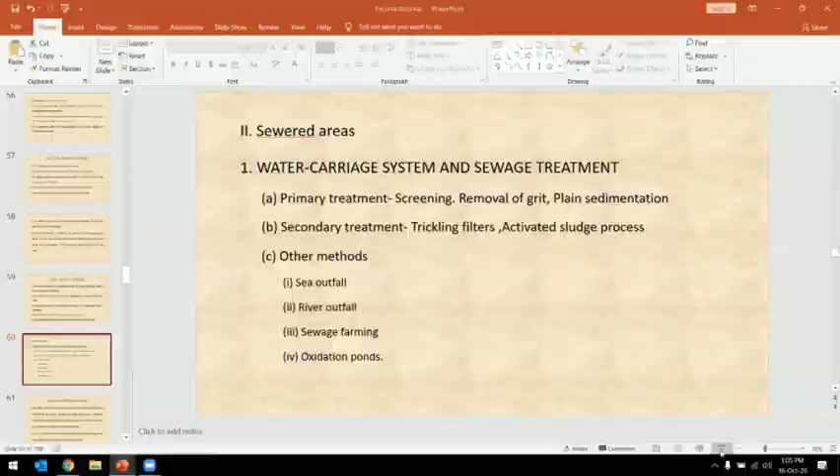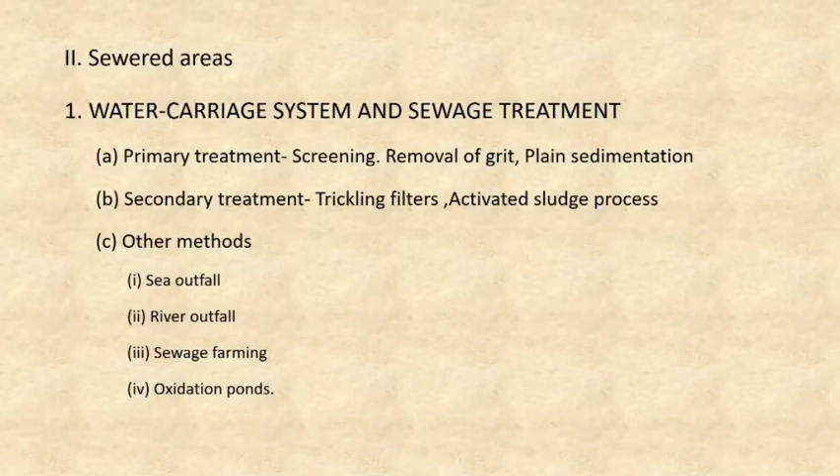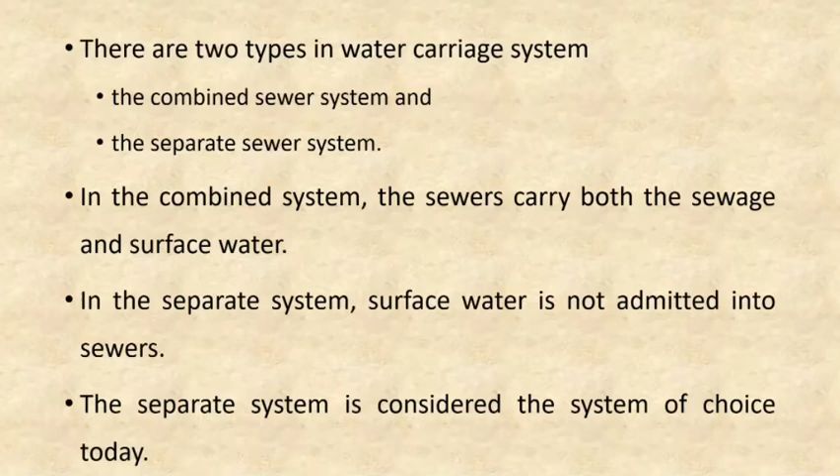So yesterday we started with excreta disposal of sewered areas, in which we completed water carriage system and what exactly is sewage, where we saw water carriage system is of two types: combined sewer system and separate sewer system. Then there are four elements of water carriage system: household sanitary fittings, house sewers, street sewers or trunk sewers, then sewer appurtenances like manholes and traps.

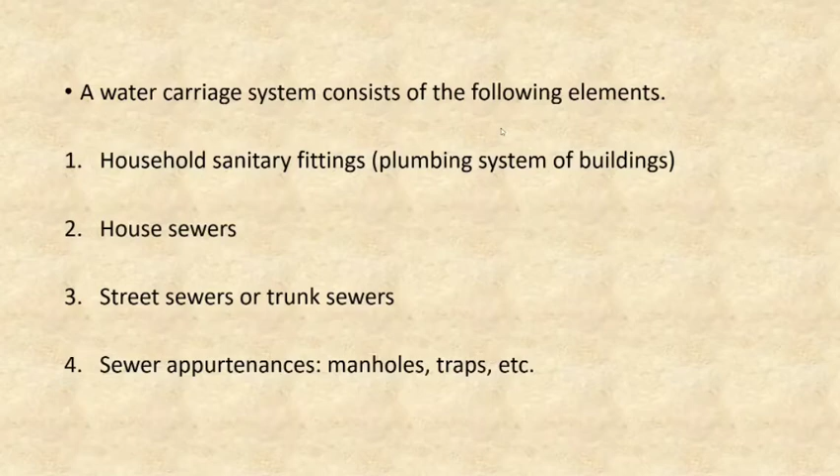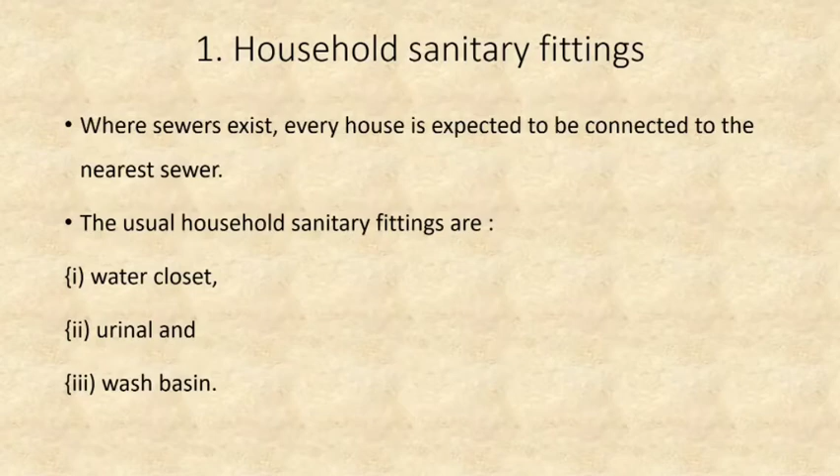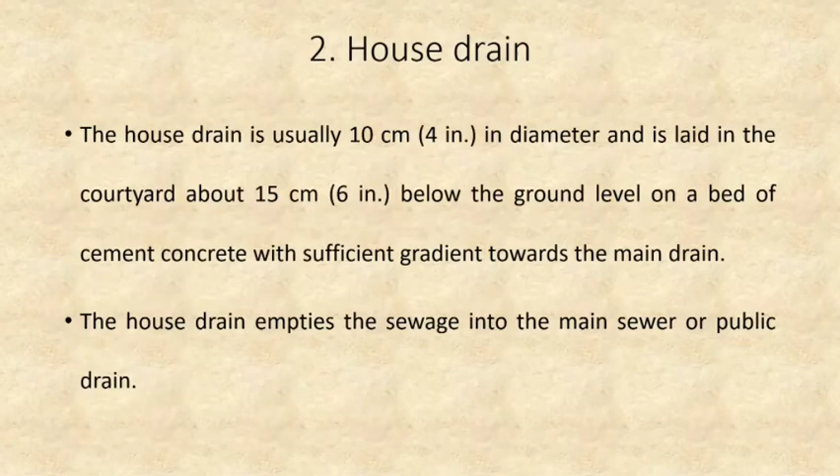Then household sanitary fittings, in which there are usually three: water closet, urinal and wash basin. You have seen what is a water closet and how it should be. Then we saw about house drains, public sewers, sewer appurtenances, that is manholes and traps, where they are placed and how they are used.

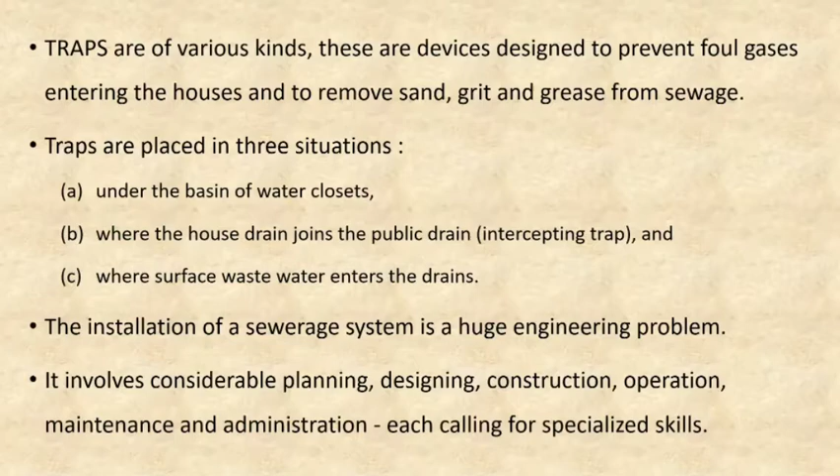Then we started with sewage. So what is sewage? Sewage is the wastewater from a community containing solid and liquid excreta derived from houses, street and yard washing, factories and industries. It resembles dirty water with unpleasant smell. The term sullage is applied to wastewater which does not contain human excreta, for example wastewater from kitchens and bathrooms.

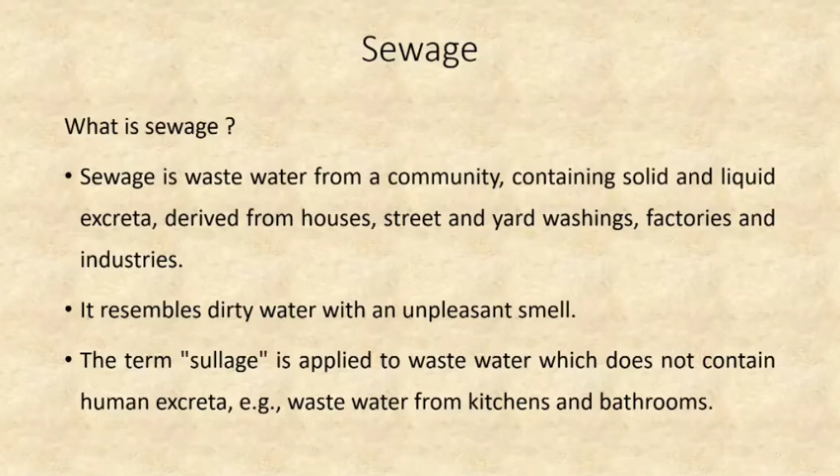And the amount of sewage that flows in the sewers depends upon habits of the people and time of the day.

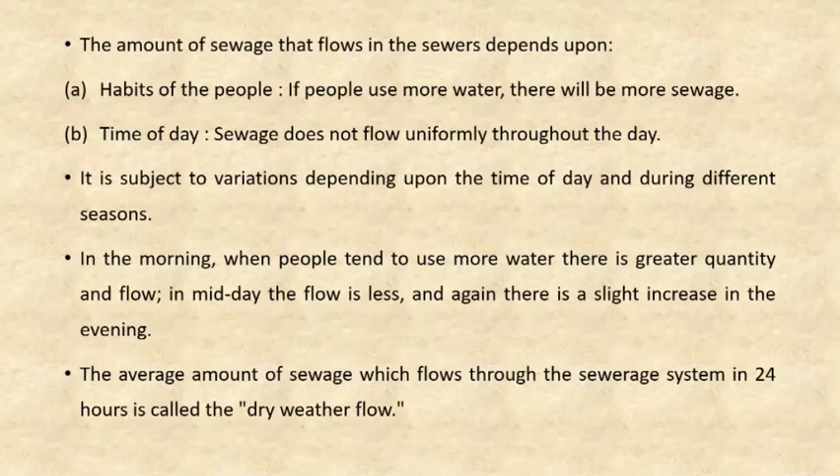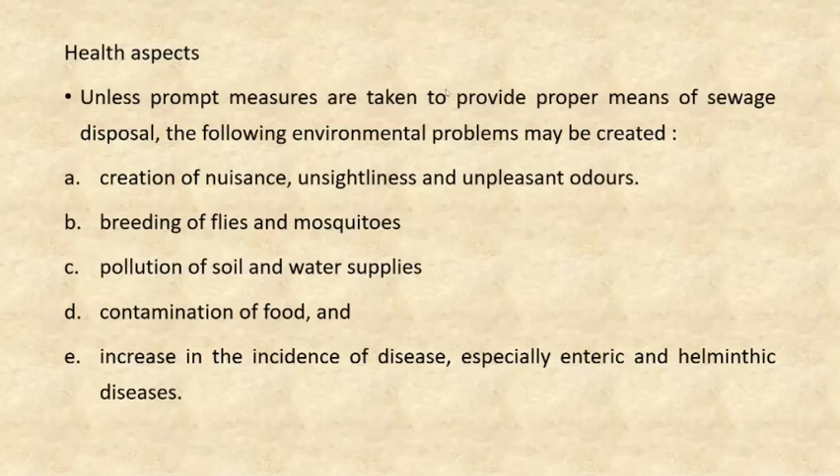Then we have seen health aspects. If sewage disposal is not done properly, there may be environmental problems like creation of nuisance, unsightliness, and unpleasant odors, breeding of flies and mosquitoes, pollution of soil and water supplies, contamination of food, and increase in incidence of diseases like enteric fever and helminthic diseases.

Then we saw the composition of sewage. So in sewage, 99.9% is water, and the other solids, comprising 0.1%, are partly organic and partly inorganic, and are also partly in suspension form and partly in solution form. The offensiveness of sewage is mainly due to organic matter.

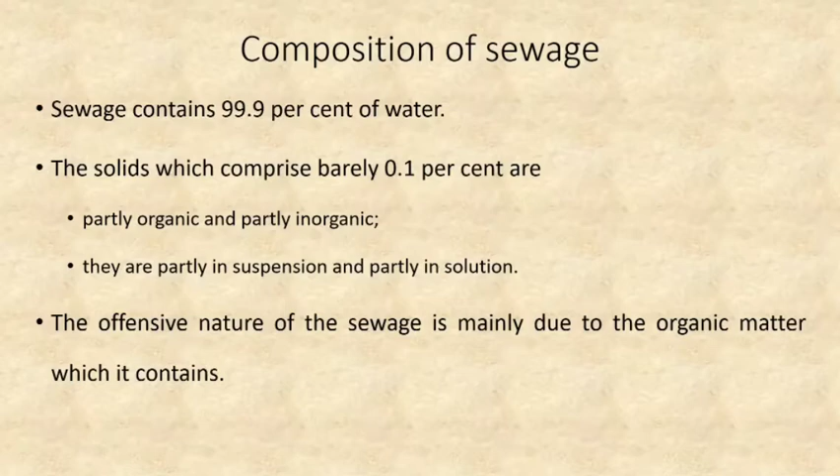So sewage is charged with numerous living organisms derived from feces, some of which may be agents of disease. It is estimated that 1 gram of feces may contain 1000 million E. coli, 10 to 100 million fecal streptococci, and 1 to 10 million spores of Clostridium.

Then, what is the aim of sewage purification? So raw sewage or inadequately treated sewage should not be discharged into rivers, sea or other sources of water supply, because oxygen in the water supply is used up by the numerous aerobic bacteria found in the sewage, and this depletion of oxygen may lead to death of plant and animal life in water.

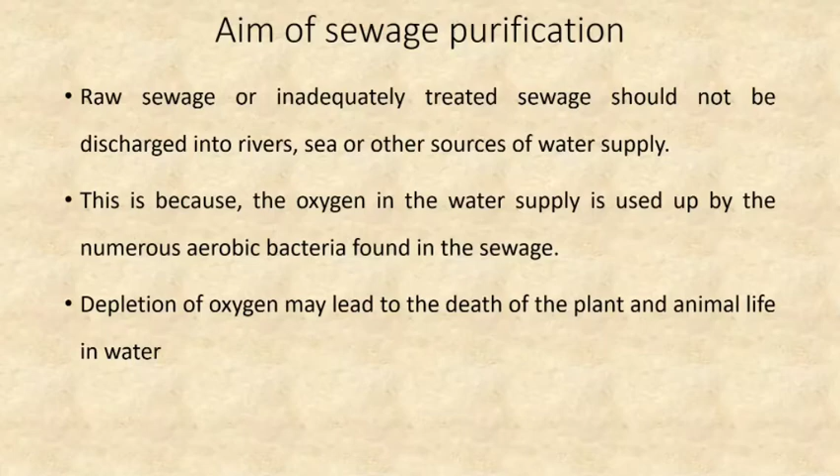So the water may yield an offensive smell because of the release of hydrogen sulfide. And the aim of sewage treatment is to stabilize the organic matter so that it can be disposed of safely into the rivers or sea.

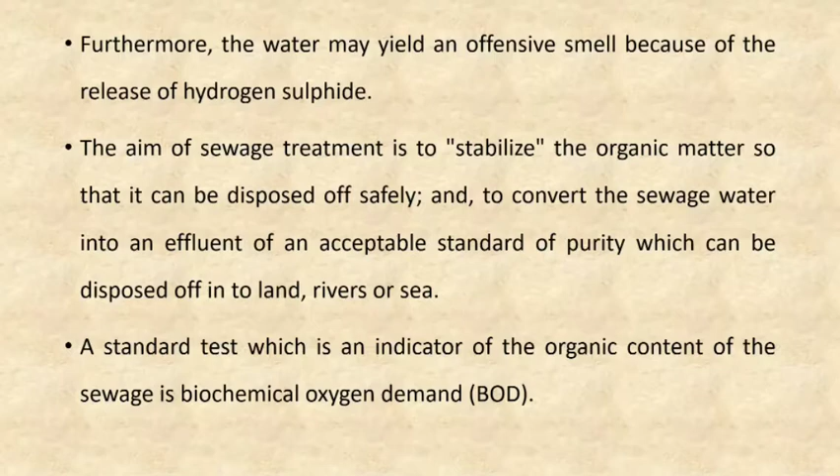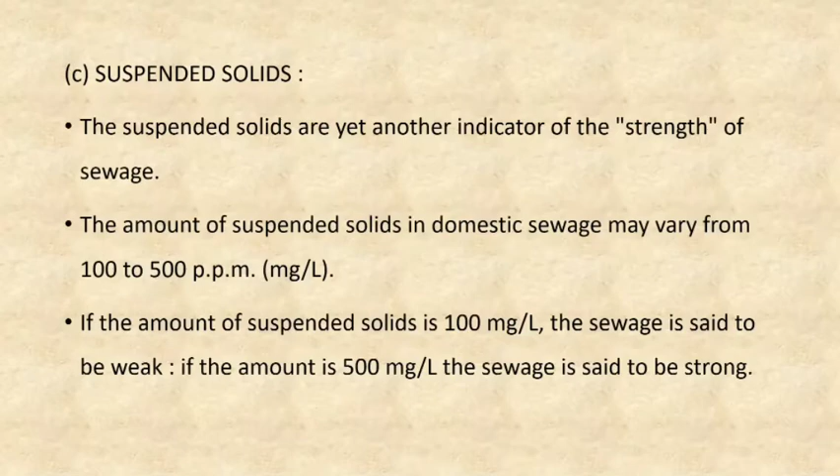Then we saw about some tests for measuring or indicating the organic content of sewage: biochemical oxygen demand, chemical oxygen demand, and suspended solids. So till here we saw yesterday.

So today, okay, this also we have seen, that is decomposition of organic matter. It mainly happens in two processes: aerobic process and anaerobic process. Aerobic process is the most efficient method of reducing organic matter in sewage.

And the process requires a continuous supply of free dissolved oxygen. In aerobic processes, organic matters are broken down into simpler compounds like carbon dioxide, water, ammonia, nitrites, nitrates, and sulfates. In anaerobic process, where sewage is highly concentrated and contains plenty of solids, this process is highly effective. Here the end products of decomposition are methane, ammonia, carbon dioxide, and hydrogen. In anaerobic decomposition, the reactions are slower and the mechanism of decomposition is extremely complex.

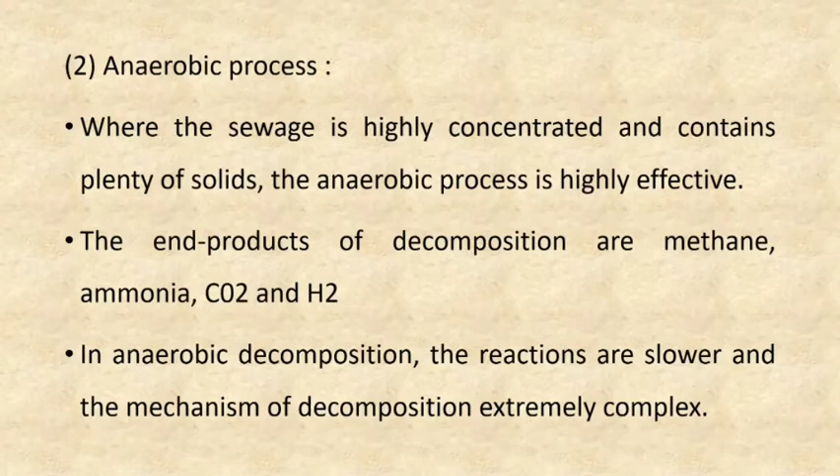So till here we have seen. Today we'll see about modern sewage treatment plant. So you have a 20 marks question on modern sewage treatment. We also have a field visit to the sewage treatment plant, which we'll plan after lockdown.

So, modern sewage treatment plants are based on a biological principle of sewage purification, where purification is brought about by the action of anaerobic and aerobic bacteria. We have seen decomposition process is mainly due to anaerobic and aerobic processes. So this plant is mainly based on these two processes, that is anaerobic bacterial process and aerobic bacterial process. The treatment of sewage may be divided into two stages: primary treatment and secondary treatment.

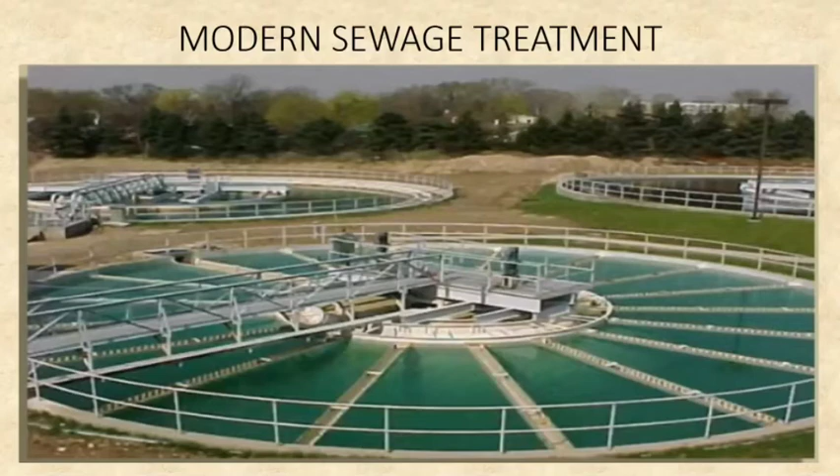We'll revise in short the modern sewage treatment plant. Modern sewage treatment plants are based on a biological principle of sewage purification, where purification is brought about by the action of anaerobic and aerobic bacteria. We have seen decomposition process is mainly due to anaerobic process and aerobic process, so this plant is mainly based on these two processes.

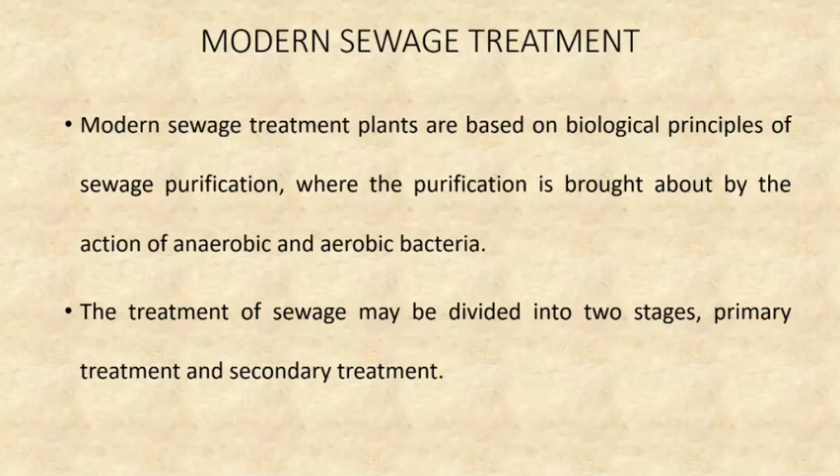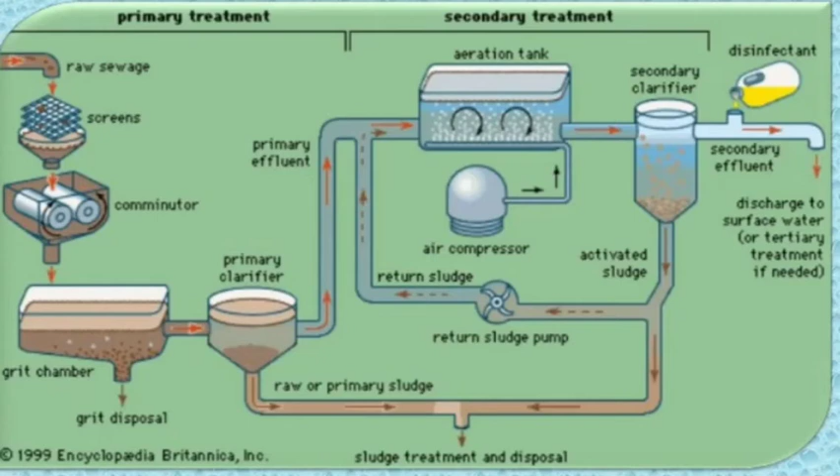So this is a diagrammatic presentation in short. We will see one by one. In primary treatment, the solids are separated from the sewage partly by screening, partly by sedimentation, and then subjected to anaerobic digestion, which is the first stage of purification.

In primary treatment, the solids are separated from the sewage, partly by screening, partly by sedimentation, and after that it is subjected to anaerobic digestion, which is the first stage of purification. Then in secondary treatment, the effluent is subjected to aerobic oxidation, which is the second stage of purification.

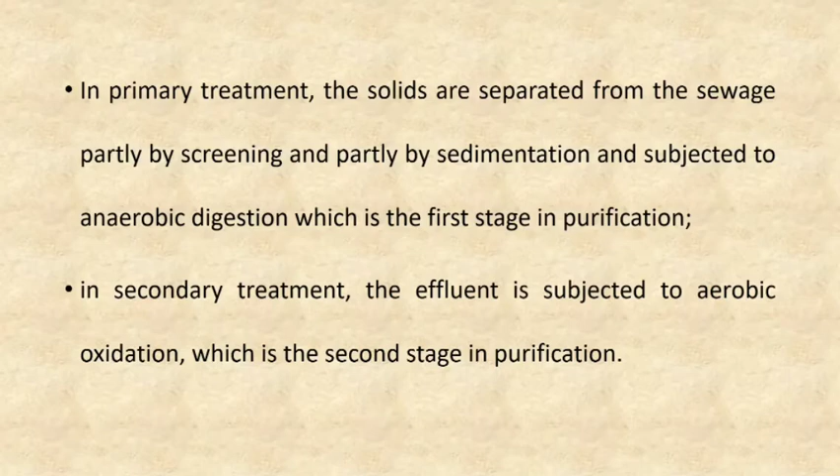In primary treatment, the sewage goes through various processes like screening, the grit chamber, and primary sedimentation. We'll see one by one.

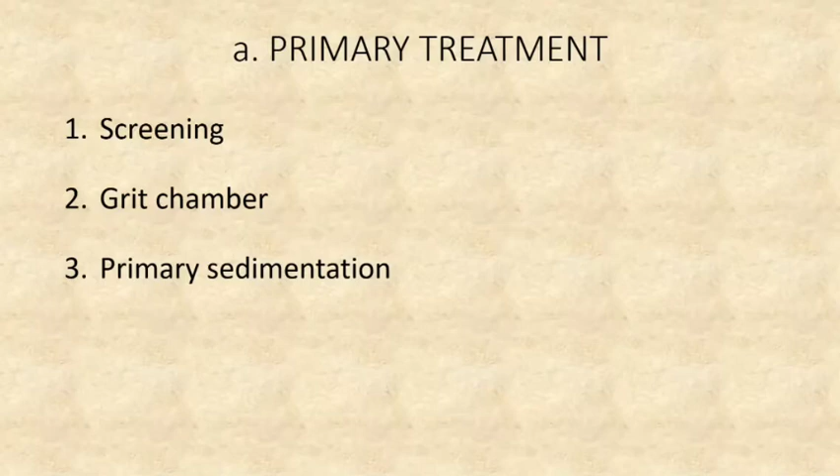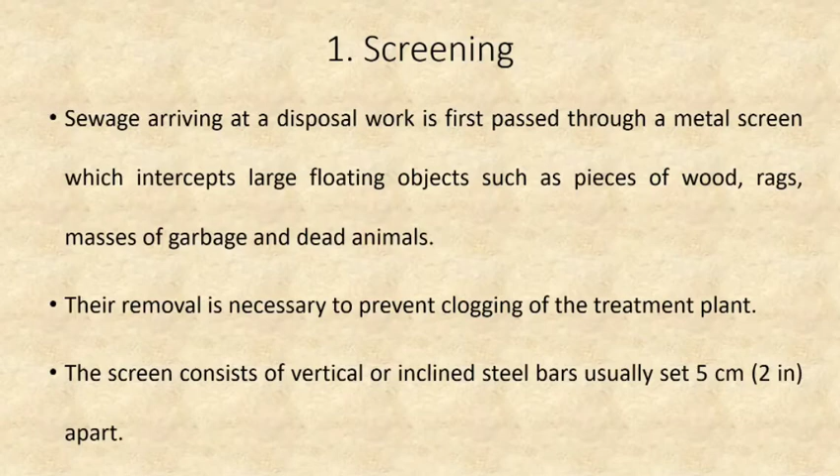First one is the screening. The word itself suggests we screen the sewage. The sewage arriving at a disposal work is passed through a metal screen which intercepts large floating objects such as pieces of wood, rags, masses of garbage, and dead animals. Their removal is very necessary to prevent the clogging of the treatment plant. This screen consists of vertical or inclined steel bars, usually set about 5 centimeters apart.

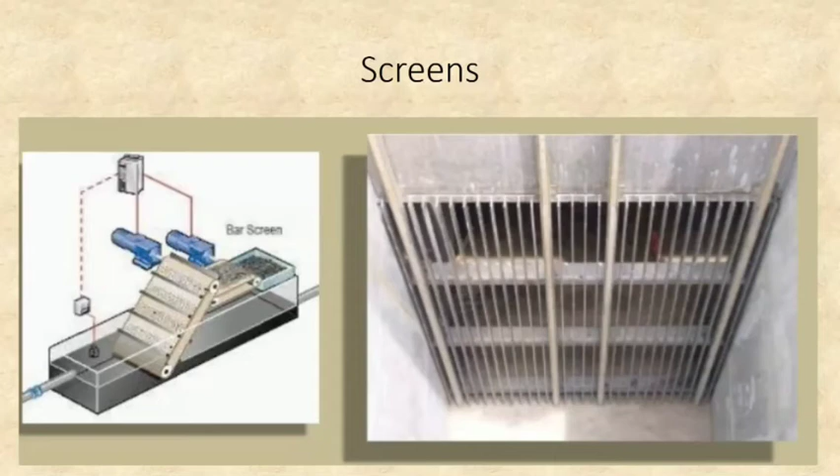In some plants, the screens are of the fixed type, while in others, screens are of the moving type. The screenings are removed from time to time, either manually or mechanically, and disposed of by trenching or burial.

Then second, after screening, the sewage is passed through a chamber known as the grit chamber. It is passed through a long, narrow chamber called the grit chamber or detritus chamber. This chamber is approximately 10 to 20 meters in length, and it is designed to maintain a constant velocity of about 1 foot per second, with a detention period of 30 seconds to 1 minute.

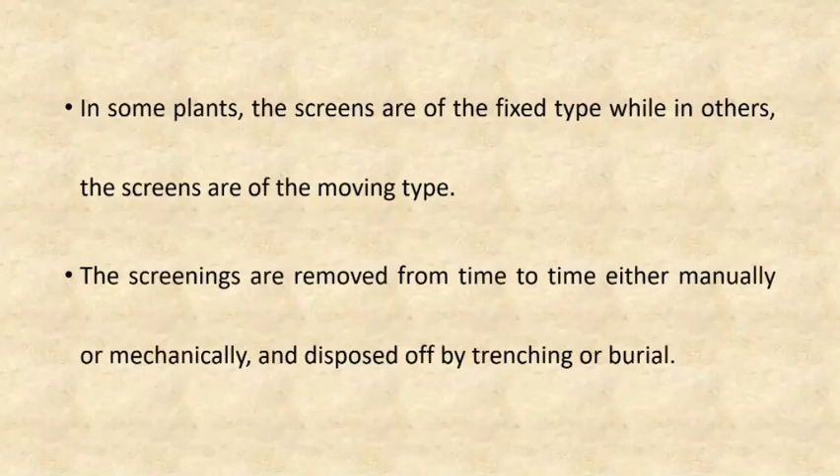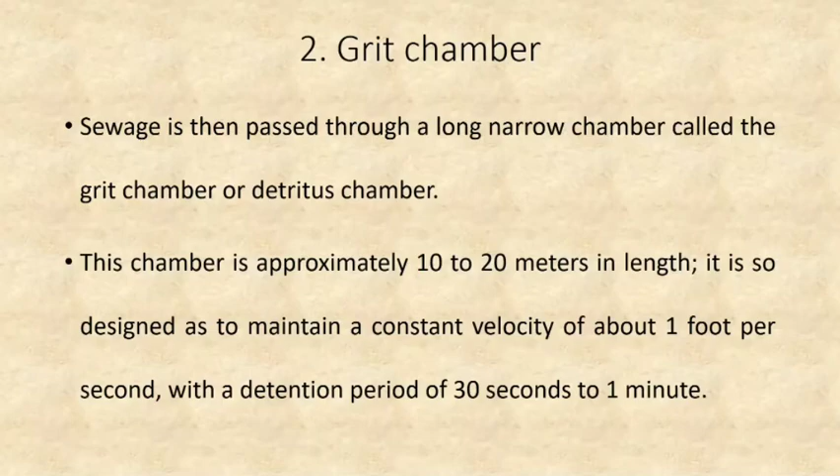The function of the grit chamber is to allow the settlement of heavier solids such as sand and gravel while permitting the organic matter to pass through.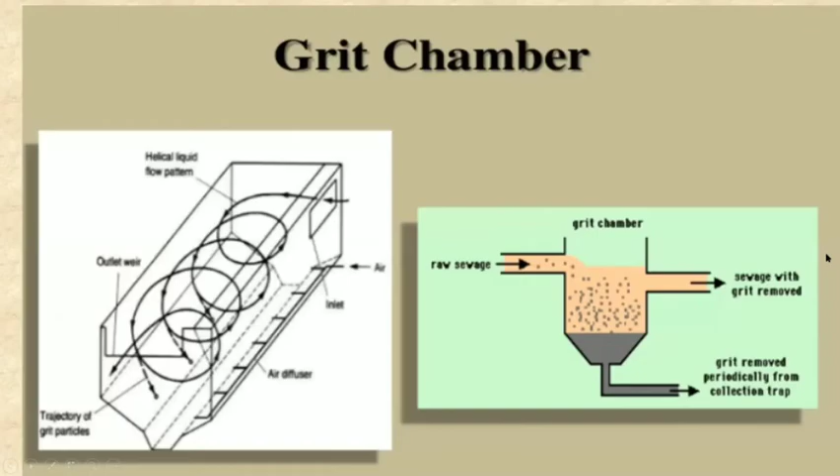Then the third stage is primary sedimentation. After grit removal, the sewage is sent for primary sedimentation. The sewage is now admitted into a huge tank called the primary sedimentation tank. It is a very large tank holding from 1/4 to 1/3 of the dry weather flow.

There are various designs in primary sedimentation tank. The commonest is the rectangular tank.

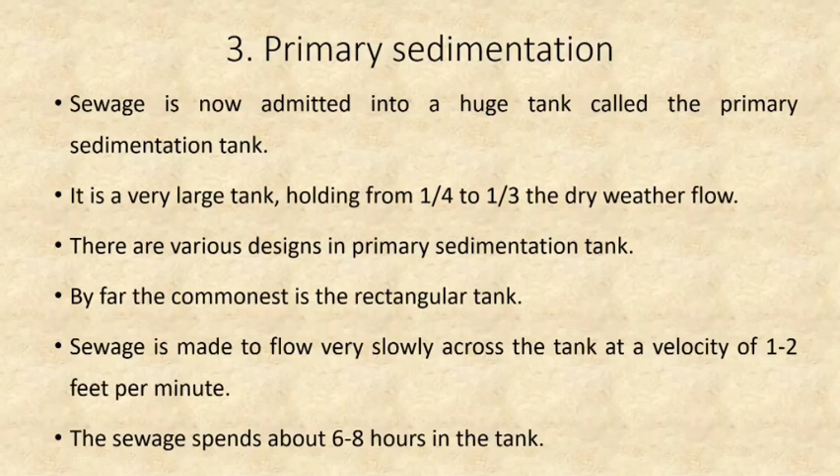Sewage is made to flow very slowly across the tank at a velocity of 1 to 2 feet per minute, so that it spends about 6 to 8 hours in the tank for proper sedimentation to occur.

During this long period of relatively still conditions in the tank, a considerable amount of purification takes place, mainly through sedimentation of suspended matter, with nearly 50 to 70% of solids settling down under the influence of gravity.

A reduction of 30 to 40% in the number of coliform organisms is obtained due to sedimentation. The organic matter that settles down is called sludge, and it is removed by mechanically operated devices without disturbing the operation of the tank.

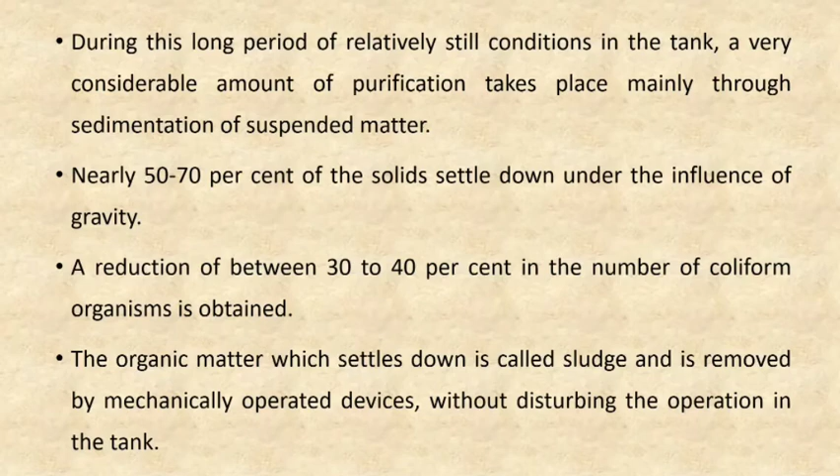At the same time as sedimentation, a small amount of biological action also takes place, in which microorganisms already present in the sewage attack the complex organic solids and break them down into simpler soluble substances and ammonia.

A certain amount of fat and grease rises to the surface to form scum, which is also removed from time to time and disposed of.

When the sewage contains organic trade waste, it is treated with chemicals such as lime, aluminum sulfate and ferrous sulfate. This causes animal protein material to precipitate very quickly.

So during sedimentation there is also biological action, and any fat or grease rises to the surface to form scum, which is also removed. If the sewage contains organic trade waste, chemicals like lime, aluminum sulfate and ferrous sulfate are added to allow the animal protein to precipitate very quickly.

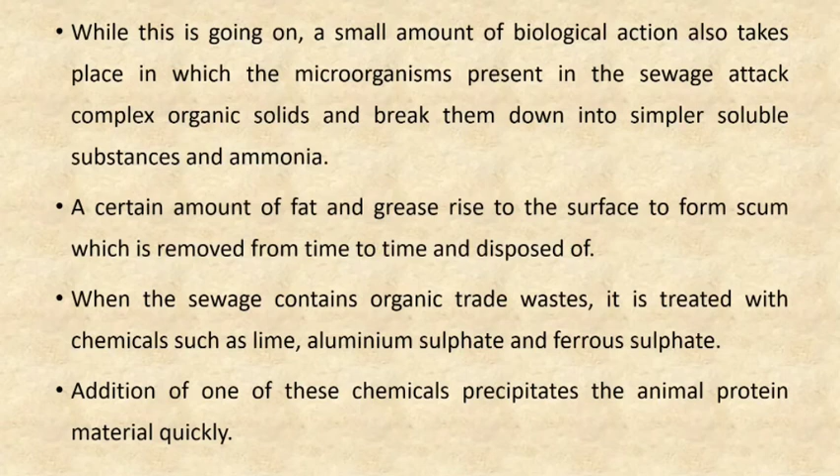So this is how a primary sedimentation tank looks like.

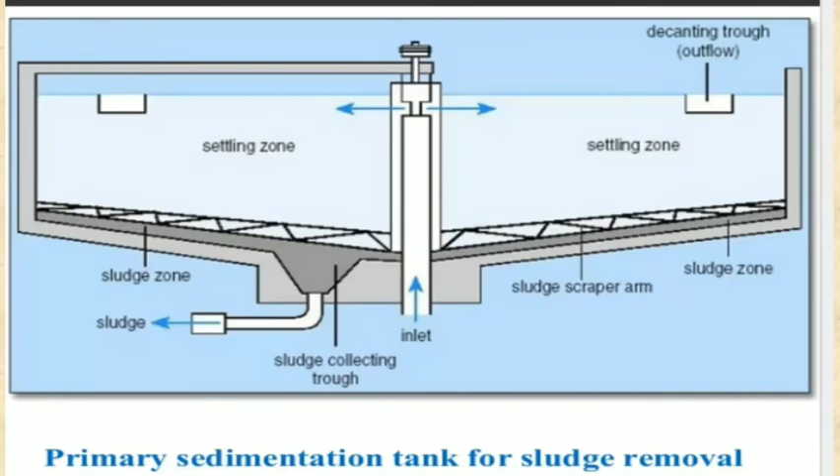After primary sedimentation, the sewage passes on for secondary treatment, since the effluent from the primary sedimentation tank still contains a proportion of organic matter in solution or in colloidal state, along with numerous living organisms, making secondary treatment necessary.

This effluent has a high demand for oxygen and can cause pollution of soil or water. So the sewage is subjected to further treatment, that is aerobic oxidation, by one of the following methods: either the trickling filter method or the activated sludge process.

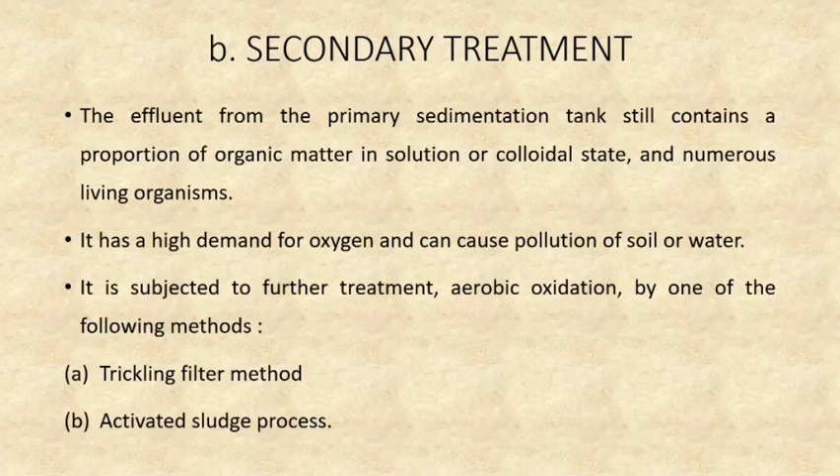First we'll see what the trickling filter method is. The trickling filter, also called a percolating filter, is a bed of crushed stones or clinker, 1 to 2 meters deep and 2 to 30 meters in diameter, depending upon the size of population in the area.

The trickling filter, also called percolating filter, is a bed of crushed stones or clinker, 1 to 2 meters deep and 2 to 30 meters in diameter. The effluent from the primary sedimentation tank is sprinkled uniformly on the surface of the bed by a revolving device.

The effluent from the primary sedimentation tank is sprinkled uniformly on the surface of the bed by a revolving device, and the device consists of hollow pipes, each of which has a row of holes.

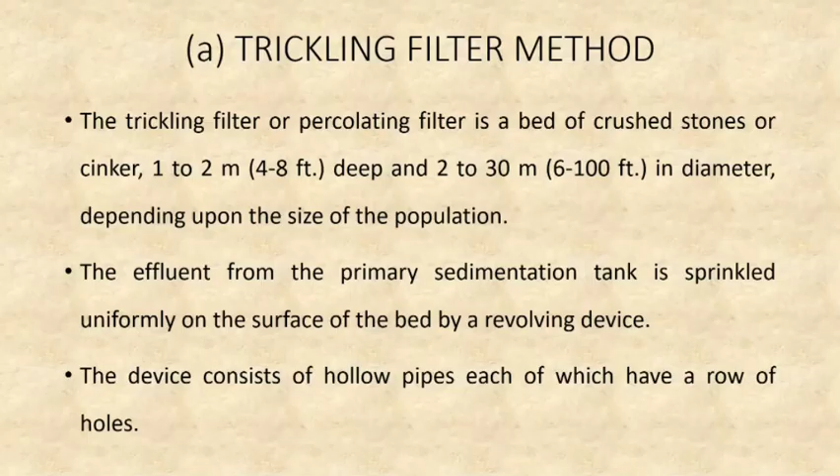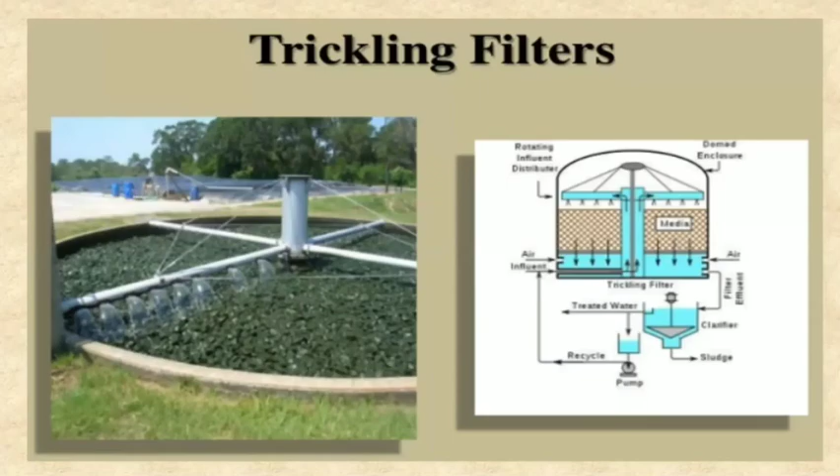The pipes keep rotating, sprinkling the effluent in a thin film over the surface and down through the filter. A very complex biological growth consisting of algae, fungi, protozoa and bacteria of many kinds occurs, and this growth or layer is known as the zoogleal layer.

We have also seen this in purification of water, so there is a formation of a layer which is called the zoogleal layer.

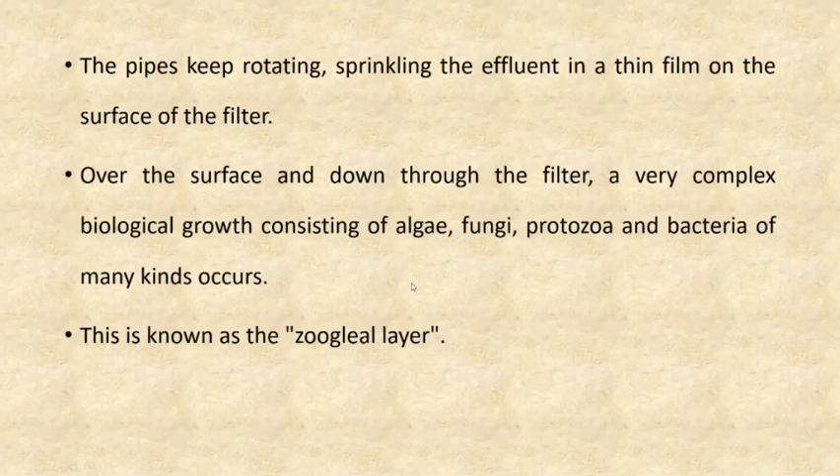As the effluent percolates through the filter bed, it sprinkles over the filter bed and gets oxidized by the bacterial flora in the zoogleal layer.

The action of the filter is thus purely a biological one, and not one of filtration as the name suggests. So it is not working like a filter, it is working as a biological process.

Trickling filters are very efficient in purifying sewage. They do not need rest because wind blows freely through the beds, supplying the oxygen needed for the zoogleal flora.

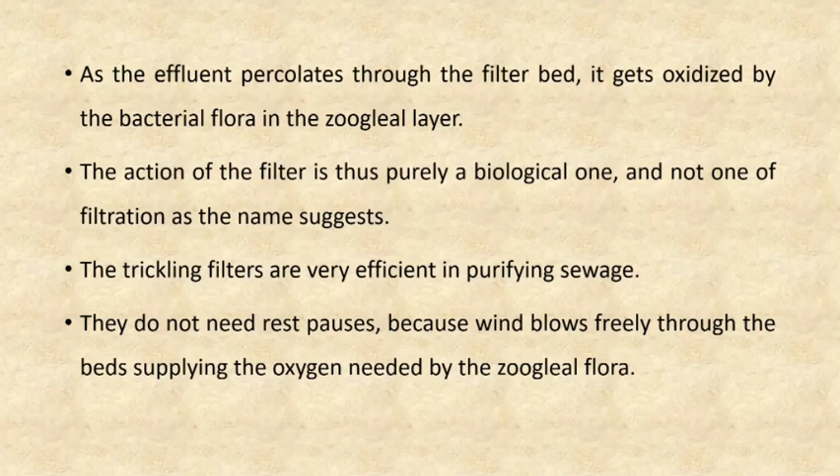The biological growth or zoogleal layer lives, grows and dies also, and the dead matter sloughs off, breaks away and is washed down through the filter. It is the light green flocculent material and it is called humus.

The dead matter which sloughs off will break away and is washed down through the filter. It is the light green flocculent material, called humus.

The oxidized sewage is now led into secondary sedimentation tanks or humus tanks. So after oxidation by the zoogleal layer, that oxidized sewage passes into the next stage, secondary sedimentation, into the secondary sedimentation tanks, also called humus tanks.

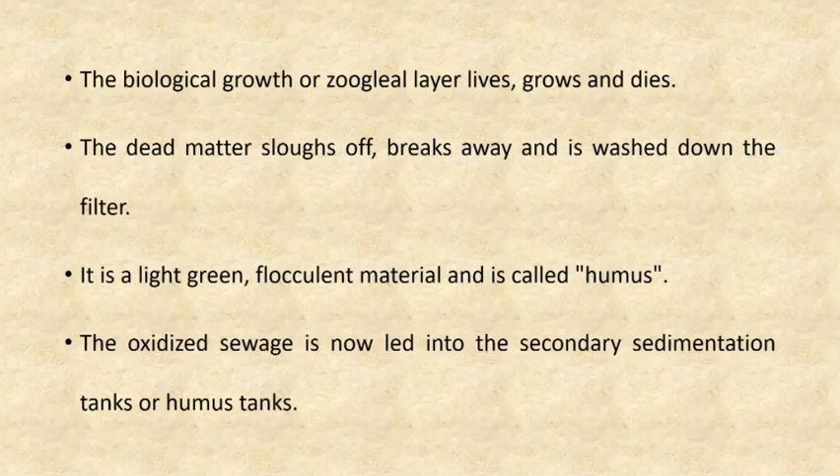So we have seen that in secondary treatment there are two methods: either trickling filters or the activated sludge process. The activated sludge process is the modern method of purifying sewage in place of trickling filter. The trickling filter is the old method, this one is the new method.

So the heart of the activated sludge process is the aeration tank.

The effluent from the primary sedimentation tank is mixed with sludge drawn from the final settling tank, also known as activated sludge or return sludge. This sludge is a rich culture of aerobic bacteria.

Here also the effluent goes through aerobic oxidation, but here we don't have the bacterial flora or zoogleal layer. We take it from the sludge obtained in the settling tank, and that sludge is rich in culture of aerobic bacteria.

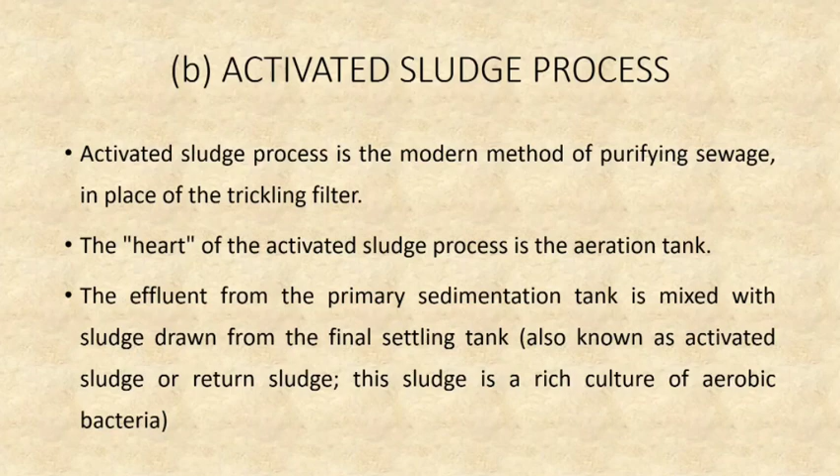The proportion of activated sludge to the incoming effluent is of the order of 20 to 30%. The mixture is subjected to aeration in the aeration chamber. Aeration means air, we pass air through the aeration chamber for about 6 to 8 hours.

The aeration is accomplished either by mechanical agitation or by forcing compressed air continuously from the bottom of the aeration tank. This latter method is also known as diffused aeration and is considered a better method, where air is forced or continuously compressed from the bottom of the aeration tank.

During the process of aeration, the organic matter of the sewage gets oxidized into carbon dioxide, nitrates and water with the help of aerobic bacteria in the activated sludge. So here also the sewage gets oxidized, but due to the aerobic bacteria present in the sludge.

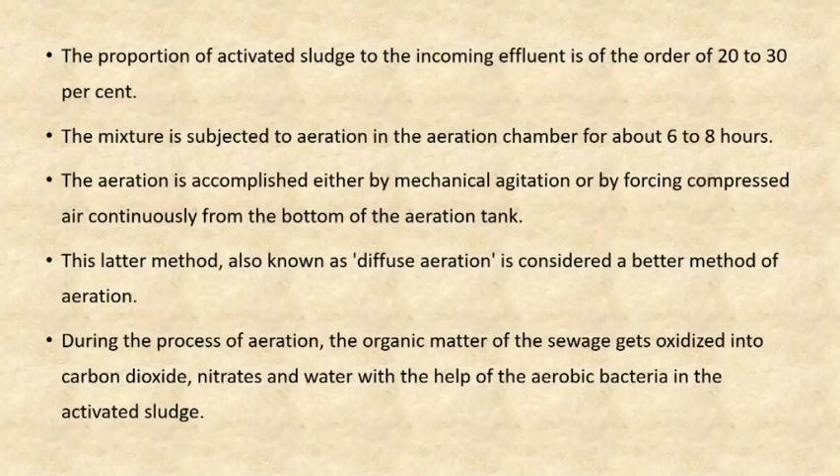Usually the typhoid and cholera organisms are definitely destroyed in this method, and the coliforms are greatly reduced.

The activated sludge plants occupy less space and require skilled operations. If we compare the filter and activated sludge plant, 1 acre of activated sludge plant does the work of 10 acres of percolating filter—see how much less space it occupies.

So the activated sludge process is therefore best suited for larger cities, and the percolating filter for smaller towns, because they are cheaper to install and easier to operate.